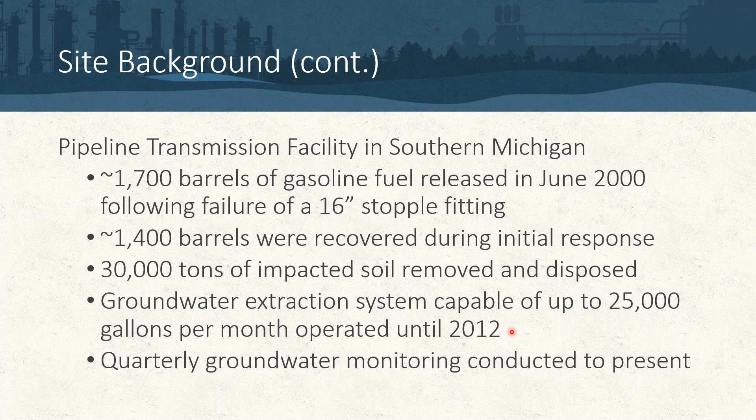A groundwater extraction system capable of up to about 25,000 gallons per month operated until 2012. And essentially, at the time that this came to us, quarterly groundwater monitoring had been conducted to the present time, and we became involved in the first quarter of 2013. So that's when we started working on this project.

And so, looking at the initial conceptual site model for this facility, we'll first look at soil. Looking at the site plan on the left-hand side, we have your benzene isoconcentrations and the orangish, reddish orbs indicating where NAPL is present in the samples.

The soil samples indicated sorbed mass begins around approximately 4 to 5 feet below grade and extends below the groundwater table. The soil borings indicated elevated PID readings in the saturated soil, but because of sampling guidelines and requirements in the state of Michigan, no saturated soil was collected or delineated below the water table itself. So this indicated a significant gap that may be present in the data package that was provided initially.

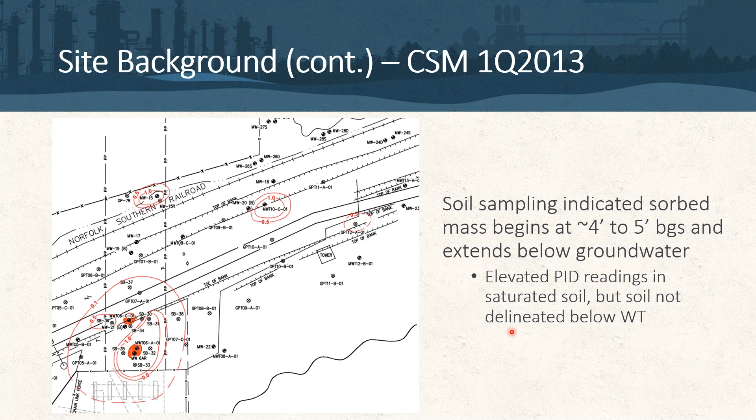Moving on to the groundwater conceptual site model, we see a slightly different elongated plume from the source indicated by the yellow orb, where the LNAPL is actually occurring in the monitoring wells. We have an approximately 380 foot long elongated plume that extends to the northeast. The groundwater impacts were primarily located within the unconsolidated sediments overlying the bedrock. We did have persistent LNAPL present in certain on-site monitoring wells. And again, I referenced that indication of connection between the overburden and consolidated bedrock unit.

We do have low-level dissolved phase constituents present in monitoring well 24D at the distal end of the plume. This is the furthest point out with any detections, and that well itself is in fact screened within that sandstone and shale bedrock. So we do have contamination being realized very far down gradient at that distal point in 2013.

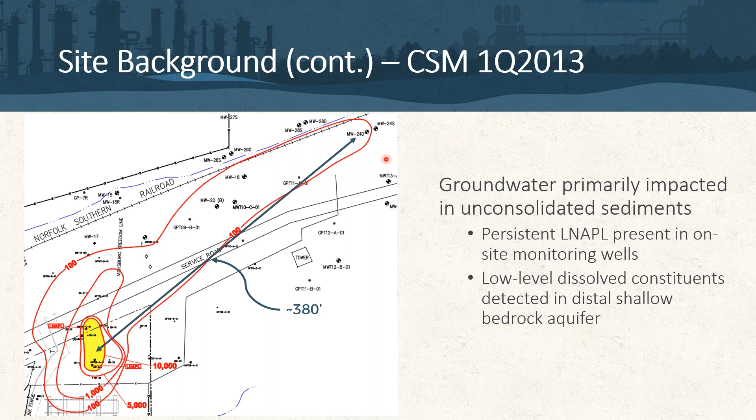And so the regulatory body, the Michigan Department of Environmental Quality, requested an updated remedial action plan to try and see some sort of resolution for this site. At the time that we became involved, there had really been no specified soil remediation goal. But they did want to see a significant reduction in groundwater contaminant of concern concentrations, and obviously the elimination of any measurable LNAPL within site monitoring wells.

My company, AST, was contacted in early 2013 to provide a remedial option for consideration. This option included a preliminary remediation design based on the existing CSM just for budgeting purposes and a rough order of magnitude estimate of scale of work.

This also included what we call the remedial design characterization. I'll talk a little bit more about that in just a second. That preliminary design and plan included a pilot scale injection of the Trap and Treat BOS 200 and a full scale injection of the Trap and Treat BOS 200. I believe I go into detail in a future slide of what that material is. If you're not familiar with it, we'll work our way there in just a second.

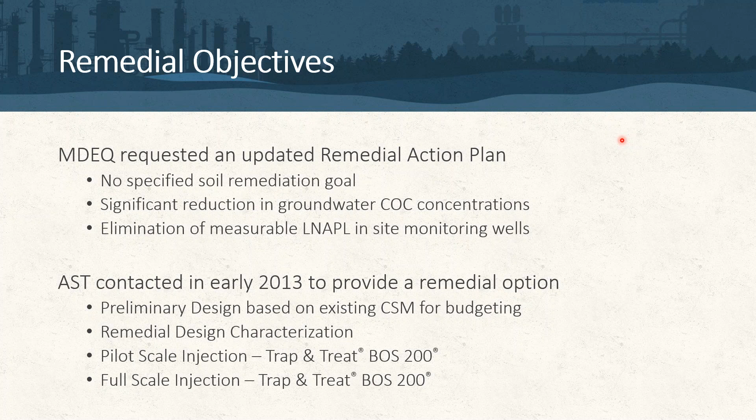So the roadmap to success on any remedial approach, and if you've ever seen a presentation by AST or RPI, you'll see this flow chart or this diagram come up frequently. What you essentially have is a treatment train, or a step-by-step process to get from beginning to end of this remedial goal. I've already talked about the initial conceptual site model review and preliminary design, and I referenced this remedial design characterization, or RDC as we call it.

What this essentially is is an investigative effort to go out and fill data gaps that are present within the existing conceptual site model. We want to get higher resolution data to more effectively and surgically design a treatment amendment for a specific facility based on the actual contaminant mass present at the site and how it varies with depth and spatially based on where you are on the property.

Taking all that data from the RDC, we come back in and update that conceptual site model to have what we believe is a more accurate picture of the actual fate and transport of the contaminant in the subsurface at the facility. We can then take that information and update the preliminary design and redesign it to be more effective and have more confident end result predictions for performance at the facility.

Once that's approved, we go to actually implementing the technology, whatever that may be. And then, of course, you want to have some level of performance monitoring to see if what you did happened and if it's working, or if we need to step back and recycle some of this information and work our way back through.

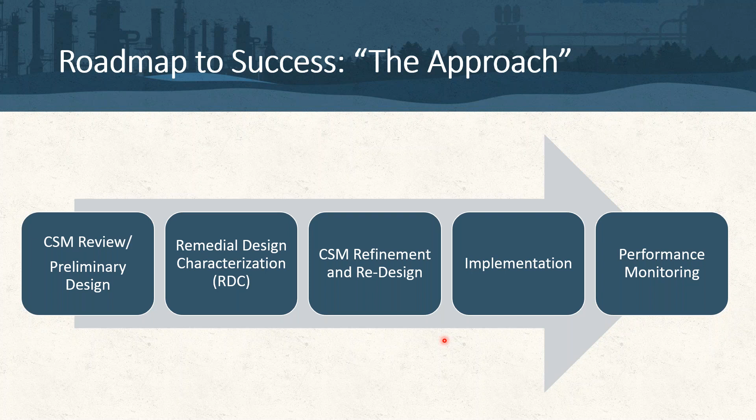This facility, as we'll see after the next slide or two, did require multiple trips to the site because of the amount of contaminant mass present. So what we can see from this model is that, by prediction, based on the information available and what we know of the site, we do have to step back through this process in order to get to the end goal of the facility.

I mentioned the BOS technology, specifically in this case BOS 200 here in the middle bottom section. We do have a chlorinated solvent treatment available to us. We have BOS 100, which is an activated carbon impregnated with metallic iron. It's a granular carbon, so a larger particle size. This is strictly looking at an abiotic beta elimination degradation pathway. The product has extensive longevity within the subsurface, 7+ years demonstrated from both lab studies and field studies, but theoretically we can go to 10+ years based on the availability of iron and contaminant present.

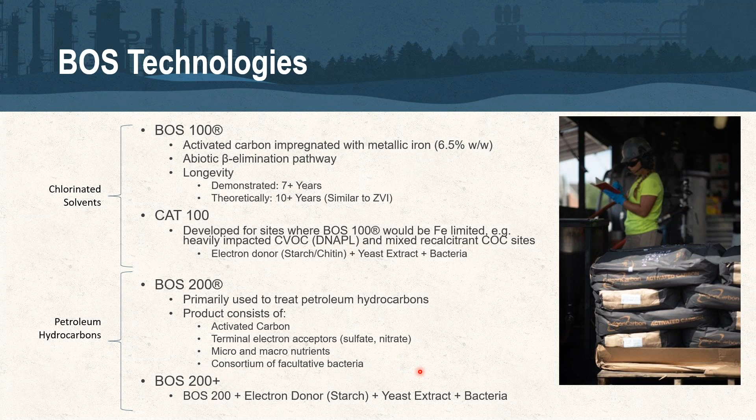At this particular site, because of the contamination here, we probably would have used BOS 200 Plus if it was available at the time, but this was a recent development and implementation within the last couple of years. So unfortunately, it was not available at the time of implementation at this facility in particular.

And so looking at the remedial design characterization, I mentioned this data gap filling analysis that we implement in order to try and update this conceptual site model and get a better snapshot. These are fairly aggressive, high density investigations that provide a substantial amount of information about what's going on at the facility.

We installed 34 soil borings going from ground surface to bedrock interface, continuously sampled every 2 feet and submitted for analysis. RPI, the intellectual property owner of the trap and treat products, has a full service environmental laboratory located in Golden, Colorado. We can send them as many samples as we need, analyzed at no cost to the project. It's a pro bono service that's built into the business model of RPI.

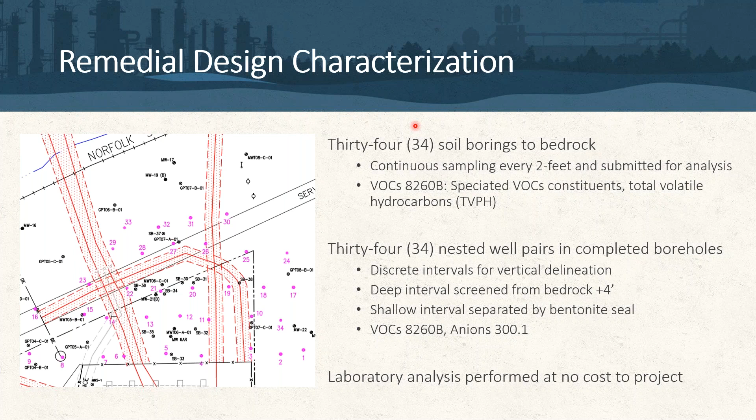And again, as I mentioned before, the RPI analysis is of great benefit to these projects because it's provided at no cost. A significant portion of a lot of these investigative costs do in fact come from lab analysis at a commercial laboratory.

Looking at the data following this remedial design characterization, the regulatory body overseeing this particular facility did establish a soil and groundwater standard defined for this remedial approach. The soil standard was established at 10 ppb for benzene. Groundwater was established at the MCL of 5 ppb for benzene.

The benefit of the RDC and the updates to the CSM showed us some very interesting data. There was the pilot study I mentioned before, so that's that first event. The amount of material required to address what we assumed in the pilot study would have been about 20% shy.

Not a big deal, but still, you know, we weren't quite hitting the mark. But what we found based on the amount of contaminant mass actually still present within the subsurface was that the second event was not even going to come close to being able to address the issues.

And I can show you here this purplish magenta line that's overlaid on the map is showing the preliminary budgetary injection design plan that was given based on the initial information. We had a barrier type approach here located directly at the fence line with 2 kind of areas in between to evaluate based on these areas of known soil versus groundwater contamination.

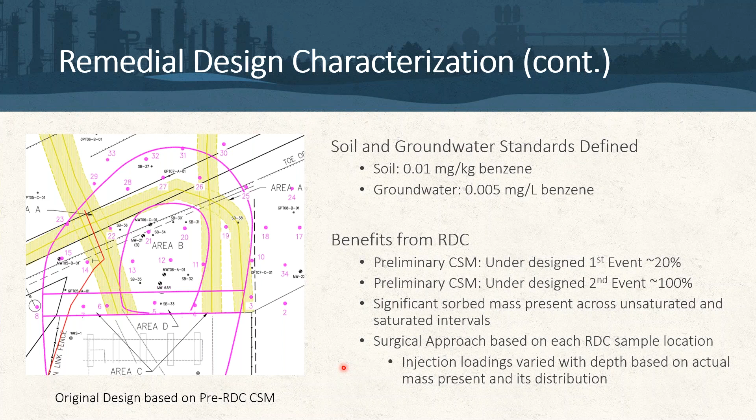And just an example of showing this variability within the subsurface, right? So again, most guidance documents or most beliefs are that if you have an LNAPL specifically, you don't have mass below the water table. However, we've seen time and time again that if you have a significant head driving that contamination, it will go below the water table. And so this is why it's crucial, especially with LNAPL sites, that you do get saturated soil data, both speciated and total mass fraction.

And so 2 points, I'll back up one slide just to give you a visual of where this is. RDC 11 and 12, this is in your source area, so we're talking about source mass here. So looking at concentration versus depth, RDC 11, RDC 12, these are 2 different borings side by side. Looking at concentration over the top, benzene is reported in ppb, whereas TVPH is reported in ppm, so just adjust your eyes for that. The blue line is benzene in soil, the orange line is TVPH in soil. Water table overlaid for you to get an idea of where that's located.

And then we have these bars here located on the left-hand side of each plot. These are the discrete intervals of the screen interval where we took a water sample from, so we're looking at benzene in groundwater specifically on both of these. And what we can see, at least on RDC 11, is we do have a significant mass contribution above the water table. However, significant mass is in fact located below the water table. We have a concentration gradient showing higher concentration benzene in the shallower zone, but probably about 40 to 50% of what we see in the shallow zone is present in the deeper zone as well. So we do see a gradient across that.

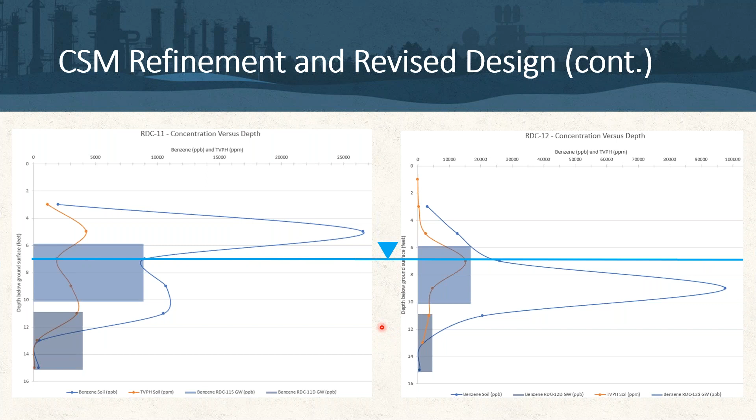So again, I talked about a surgical design based on each injection point. This table to the right is fairly busy. Don't focus too heavily on it. The main point I just wanted to show here is how we carve this specific area up, both based on the area reflective of the individual RDC point that it's designed, but then also the variation of the dosing of the BOS 200 with depth.

So it's quite valuable, again, to be able to have this high density soil and groundwater sampling, because we do have the power to be able to do this and to be more surgical and efficient with the placement of the product. And again, here's just the variability. I'm showing the overlay of the original assumed plan based on the pre-RDC conceptual site model, but then this colored variation of each individual area that's depicted on the right-hand side by the tabular form of how we actually carve the site up and implement this technology to be deployed in the field during full-scale remediation.

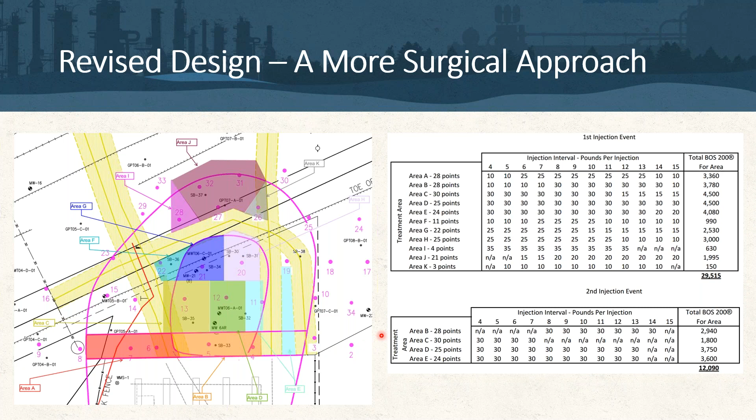And a little bit of talking about the actual methodology. BOS 200, as I talked about, is a powdered activated carbon mixed with other solid amendments that are partially soluble. So we're actually injecting slurries here. So there are some best practices to installing slurries in overburden settings. Nice little schematic on the left-hand side showing temporary dedicated direct push points that are installed but then abandoned after the installation. Again, these slurries are installed using a high flow rate and relatively small injection volumes. We're putting a very dense injection grid in place.

We have placed this material into the formation through the injection of these high pressure bursts of material. We do that in a top-down fashion where the path of least resistance is in the horizontal versus the vertical. Again, these are dedicated temporary points, and the rows that we install are perpendicular to groundwater flows. So we can see a completed borehole here with an individual interval shown here and here. These are typically offset by about 2 feet. Oh, by the way, once we get finished, we seal the hole with bentonite so that it seals the hole up.

The adjacent point, if we were to picture the row of points going from left to right here, these would vary and stagger off of this 2-foot spacing. These would be like odd intervals, and these would be even intervals. But you can also envision both coming out of the screen at you and going into the screen away from you, that this is varying with the adjacent points in the rows with it. And so what you end up having is this interconnected latticework of tortuous pathway for groundwater to move through that at some point it has to intersect one of these injection intervals. So it's trying to get a fairly dense installation of this material.

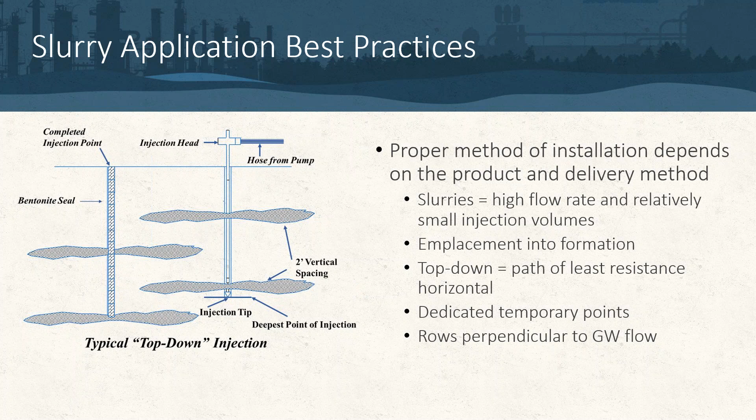So following the implementation of the first injection event, I mentioned that kind of flow chart earlier in the presentation, that sometimes you need to repeat this in order to get a better picture of what's actually going on at the site. So we did a first round injection, 2014 is when it was implemented. And we came back 1 year after that was implemented and did a second RDC so that we could see performance of the soil reduction and get a snapshot to update our baseline for tweaking the second injection event that was planned.

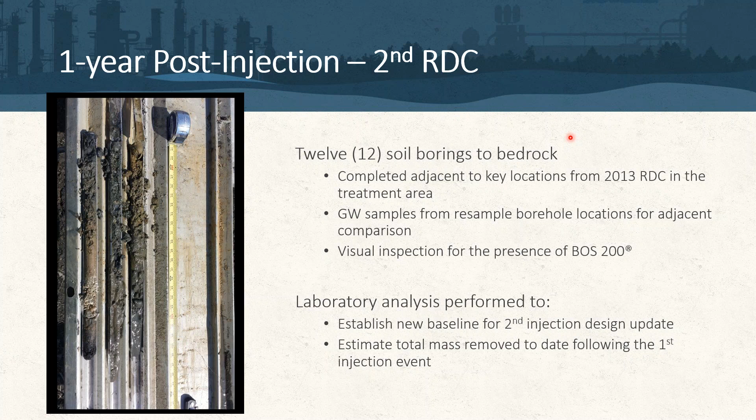Again, that laboratory analysis that RPI was performed at no cost, and that was used to establish a new baseline for that second injection design update. And we also looked at that to try and just get an eyeball estimation of total mass removed to date following the first injection event.

And so based on some of those limited, I'm using that term quite boldly here, that we can only look at a small snapshot. 12 points over that entire treatment area is not a lot of points. But from that limited data, we saw an up to 85% reduction in benzene in some areas in the soil, looking at a 68% reduction in the TVPH, that's the total contaminant mass, which when you're removing LNAPL, that's the

most important. But then we look at groundwater, we see some similar numbers as well, 73% reduction in benzene. Again, these are the higher numbers I'm picking here, an 88% reduction in TVPH. So a full-scale second event was approved and implemented in 2016, and both the consultant and the client that was actually paying for this, and this is in fact an insurance covered release for the pipeline transmission, this facility itself,

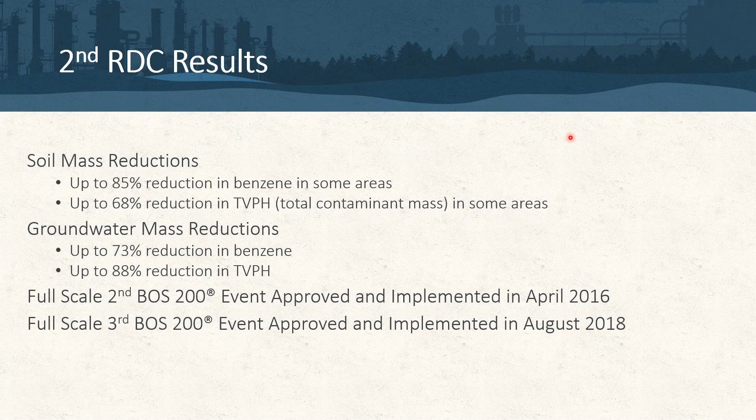they opted to go ahead and do a third event to try and expedite that closure, which we implemented in August 2018. So we aren't going to be monitoring for as long as it was predicted to be evaluated following the implementation of these technologies. So I just wanted to highlight some data before we step into some of the closing pieces of information of performance at the site.

So we see immediately after injection, roughly at 6 months, looking at the seasonal colder months here, we see a significant attrition and reduction in that extent of that benzene groundwater plume. We also see a significant mass reduction, right? We started at 5.9, we're now at 2.1 total mass pounds of benzene, right?

But what's really important to see is that we have right at the MCL detection, just above it in monitoring well 24D here. And so as we continue on forward, just picture all these different shapes and aerial extent, as well as the relative orders of magnitude concentration in these wells.

We see, within less than 1 year, we see non-detect concentrations show up in that bedrock well. So we've cut off the source that was being realized within that well in the bedrock further down gradient. We also see that we're bringing any overburden mass closer and closer to that defined property line.

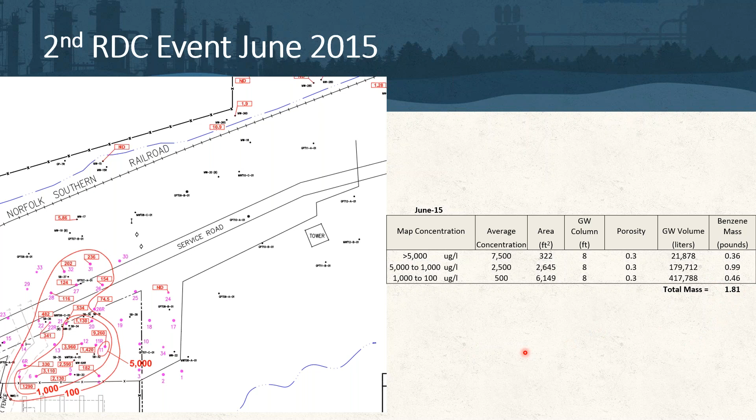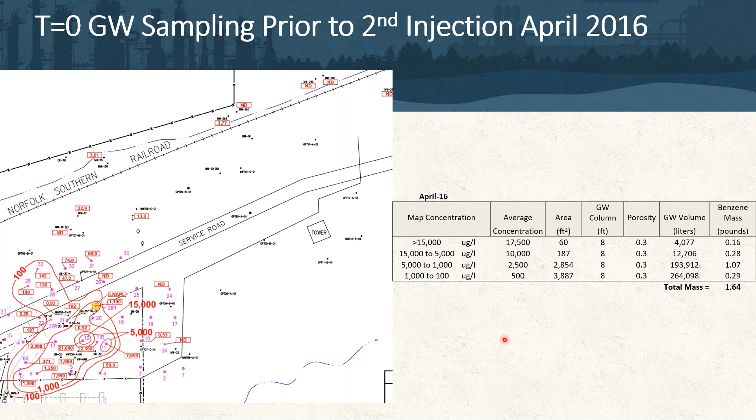So this is time equals 0, immediately prior to that second injection event in April 2016. We can see the plume is fairly stabilized within the area of the actual treatment, and all distal concentrations are either non-detect or below or approaching the MCL. Looking at that power of the carbon, the instant reduction, significant reduction in total contaminant mass.

We do have a couple blips of NAPL. These are adjacent to the pipeline. Keep in mind, we're obviously limited. We can't inject in the pipeline itself, so we do have a sustained source that remains ever present from the geology that's adjacent to the pipeline, and we were specifically limited on proximity to that, so we know we can't get treatment amendment up into that area, so we have to essentially try and account for the back diffusion or the bleeding off of mass that's continuing to hemorrhage out of that material around the pipeline itself.

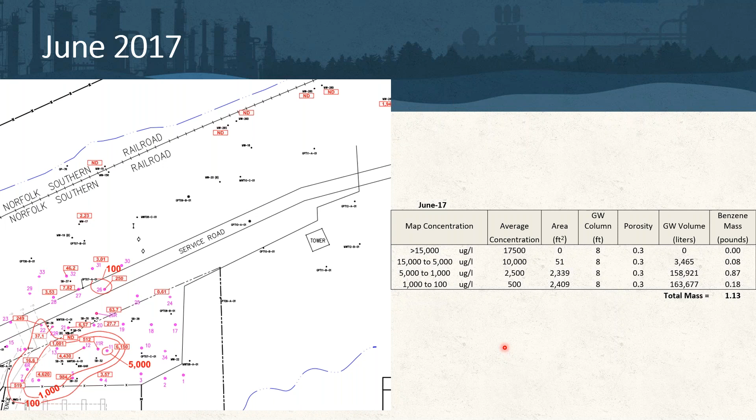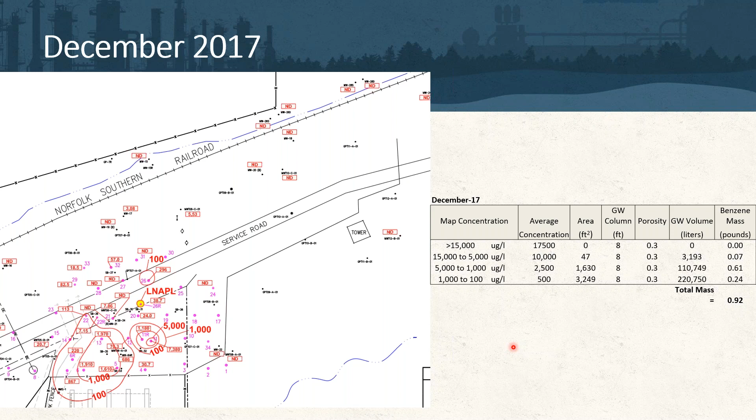So looking at June 2017, further stabilization, we see the NAPL disappear for a while, approaching that 1 pound of benzene contaminant mass. Now we're below the 1 pound of benzene total contaminant mass. We do have a little blip of NAPL in 26R. That location is right where the two pipelines cross, so we got a little bit of a hydraulic trap there, so to speak. So we see NAPL will tend to sporadically collect in that area or within the source as time goes on.

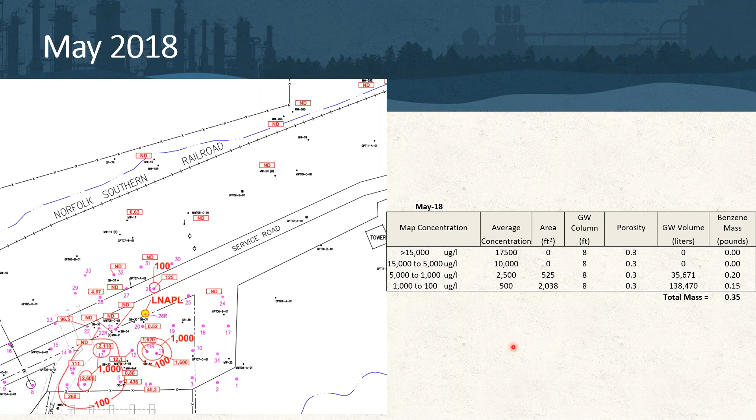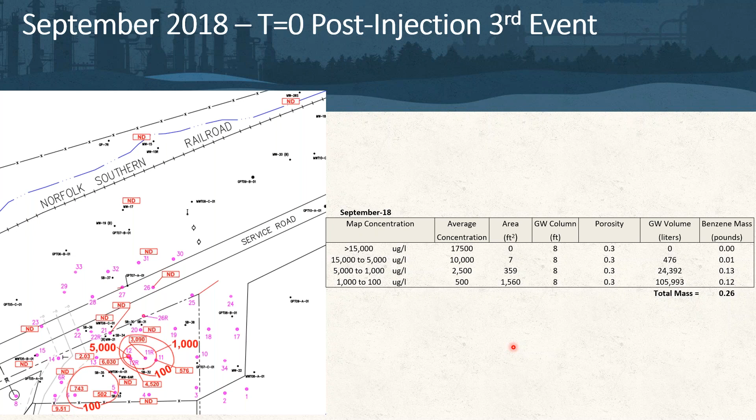Here, a little bit of dynamic change following that event. We're looking at 1 quarter post-injection. We do have NAPL showing back up in 11R and at RDC 22, which is located kind of right at the property boundary there on the kind of northwest side.

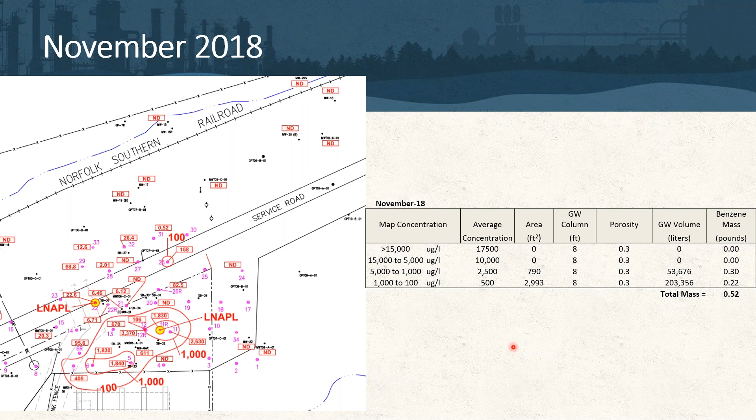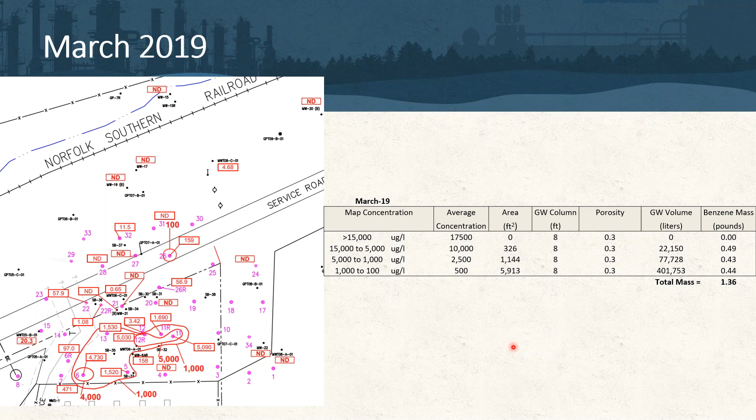But it's also adjacent to a pipeline, so it's probably seeing a little bit of mass coming out of that backfill around the pipeline itself. March 2019, things kind of stabilized a little bit more. We do get back over that 1 pound of benzene mass for a short time, I believe, here, but we do see that NAPL has not returned at this point.

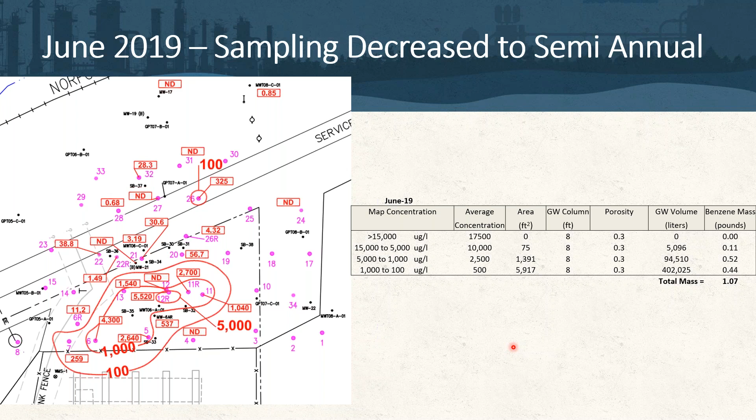Moving into June 2019, the regulatory body MDEQ has decreased the sample frequency to semi-annual instead of quarterly at this point. Again, we're looking at mass again approaching that 1 pound benzene mark. Again, we do get a little bit of a blip of NAPL showing up in 26R. Again, it's just showing up as a minor sheen, but it is detectable and measurable. So just have to kind of keep an eye on that.

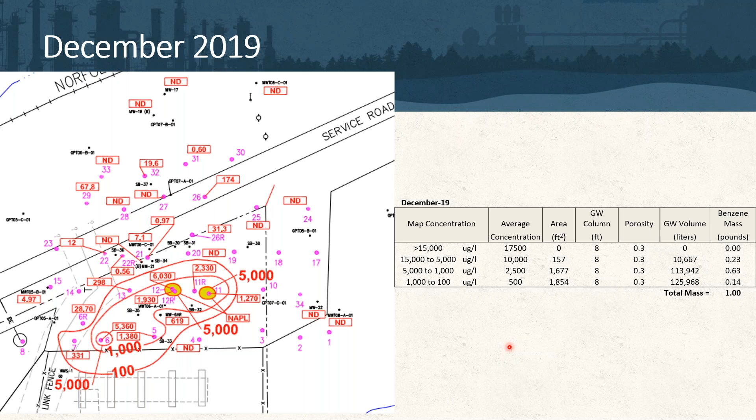But these are those two RDC points that I identified earlier from both the RDC and identifying as the high mass zones that are present within that source area. So again, here we're now below the 1 pound. We're looking at December last year, so we're rapidly approaching the end of the sampling period that I have available to show to you. We are below that 1 pound of benzene, doing quite well on the speciated mass measurement that's being measured with time for performance.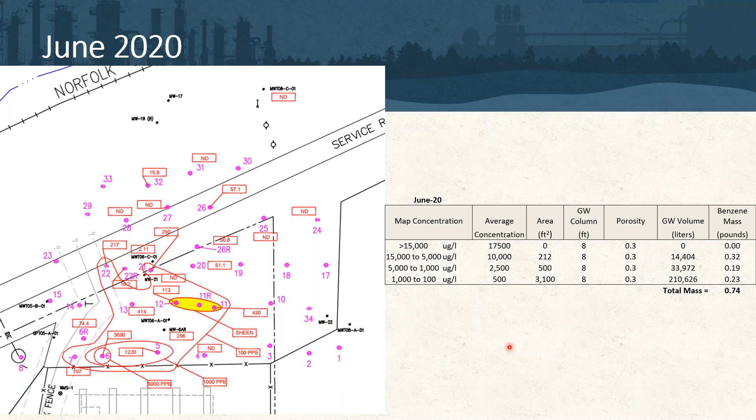Then looking at December of last year, there is a current data set at the lab that I don't have available to me just quite yet. We'll be reporting on that update once we get the data from them. But we can see again, just that little sheen shows up in 26R and 11R. The client did go out here and replace 12R and 11R because these were small diameter wells, and they believe that there may just be some LNAPL mass bound up in the filter pack itself.

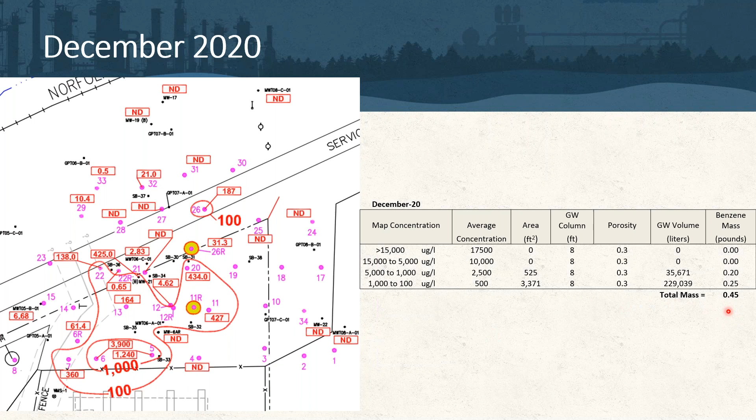And so the idea is that putting in a new well and getting a true, larger diameter PVC construction may be the way to actually get a better representation of what's going on here in this subsurface and adjusting the screen interval. So what we see here is just that little sheen of NAPL, but again, we're at that lower limit of benzene mass. I do know from the most recent gauging event or sampling event that occurred in May that there was not any NAPL measured in the new wells after installation. So fingers crossed, one of the goals out here is to eliminate the NAPL. And so once we see that go away, they can move forward with dialogue for a risk-based closure at the facility.

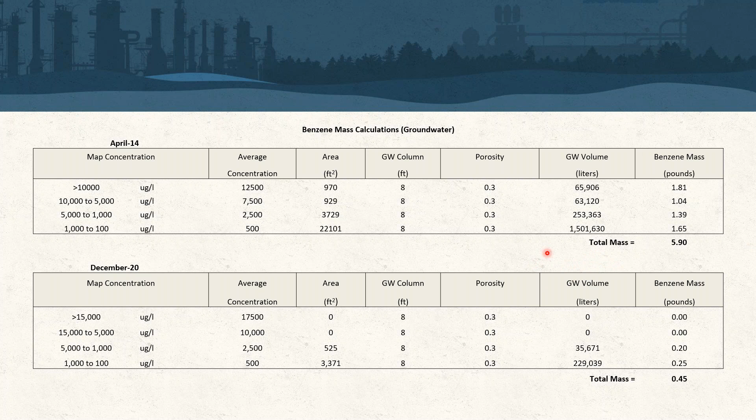So site's doing quite well, the client's happy, the consultant's happy, we're happy with it, and one of the benefits of it is because of the nature of the site, we're permitted to monitor this for a very long time and show the efficacy of this product and how well it works in a sustained long-term setting.

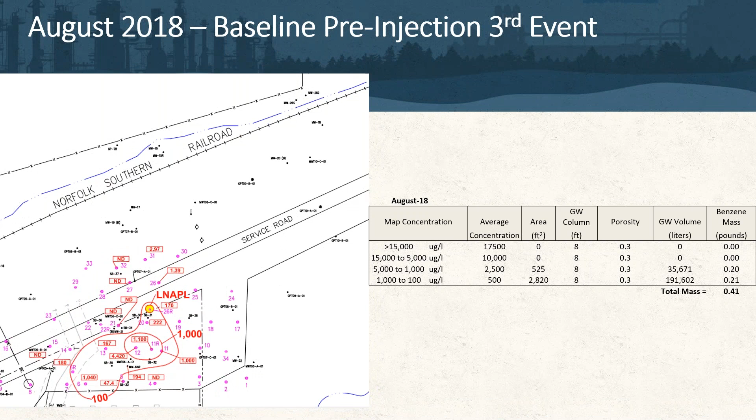So I'm going to pull my presentation back up because I've got the option to do so. Let's see here. So see the nice tiger on the screen. And I'm going to go from current slide because I want to go back. Can you see the presentation on the screen, please? We can. Thank you, Paul. Sorry, I'm advancing back quite quickly. I apologize.

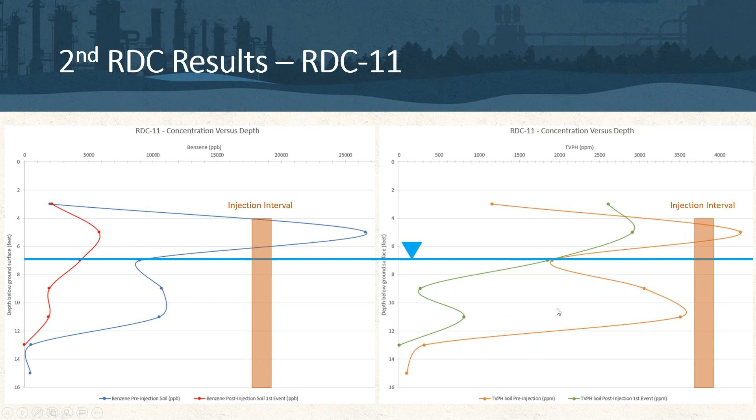But we can see the TVPH, when we're looking at that total mass fraction, is a little bit retarded here because of how fast that material comes off of the unsaturated soil based on vapor movement, or call it downward migration of precipitation as it moves through after a rain event. But we look at the degradation rates, the comparative reduction between these two data points is more significant than here.

So, oh, sorry, my pointer's off. So I've been pointing this whole time and nobody can see my pointer.

So talking about shallow conditions here, this percentage between these two data points versus these two data points, and then these two data points, right? So you can see that space between here is not as big as the space between here. So we get more efficient rates of degradation in the saturated zone than in the unsaturated zone. So long-winded version of response, but that is the case.

Thank you, Paul. There's one more question from Hayley, and I just want to acknowledge Hayley is from Shell, but she's also the NICOLE chair of the organizing committee for the SustRem conference that's being hosted. Hayley asks, was there any physical LNAPL removal, or were all the reductions attributable to the application of BOS?

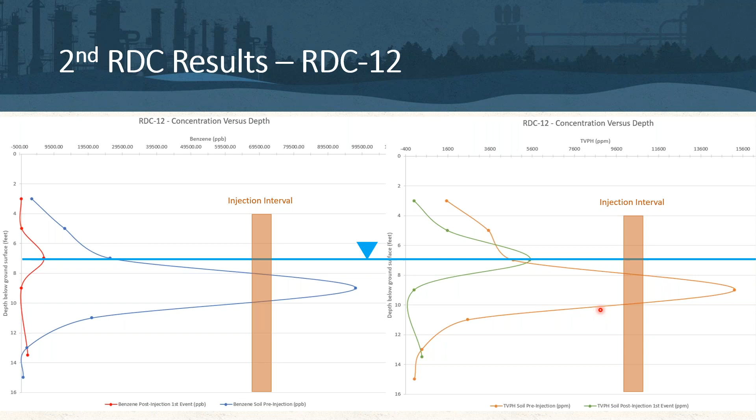Very, very good question. So physical removal of NAPL did occur prior to implementation of anything that we were involved in. Prior to the RDC, prior to the first injection event, there was a mechanical system operating on the facility property that was capable of about 25,000 gallons of extraction per month. However, that system was terminated prior to us becoming involved in 2013. So all removal following us becoming involved has been strictly handled by the implementation of this technology.